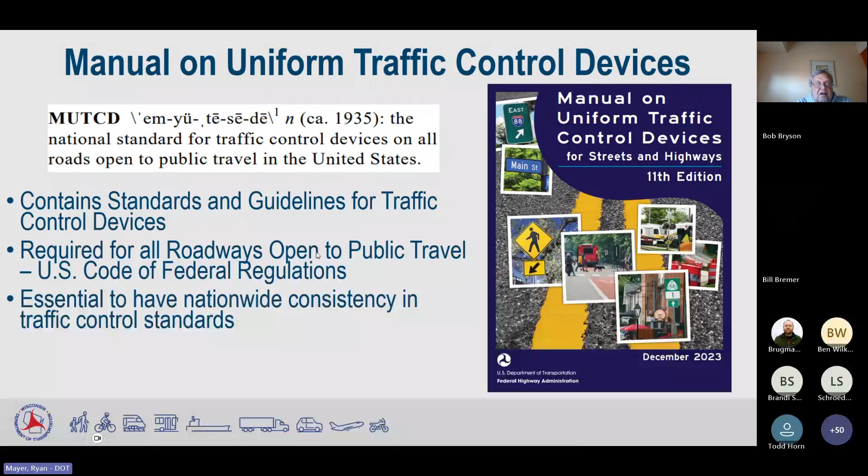The 11th edition of the MUTCD, we just adopted it. There's a bunch of statutes that say we need to adopt a manual, and Wisconsin has decided that we develop a state version of the MUTCD, the WMUTCD. That WMUTCD must be in substantial conformance with the national version of the manual.

This go round, we worked a lot closer with FHWA than I believe has been the case in the past. There's a significant effort on FHWA's part to make sure our manual conforms with the national manual, whereas in versions past, maybe a little less emphasis was put on that.

If you look at the previous Wisconsin MUTCD, you'll see a significant amount of state-specific text, as compared to this new manual, where once again we're trying to be consistent nationwide. So ideally you would have no state-specific text in the manual on uniform traffic control devices. But obviously there are cases where state statute requires you to include something specific to Wisconsin.

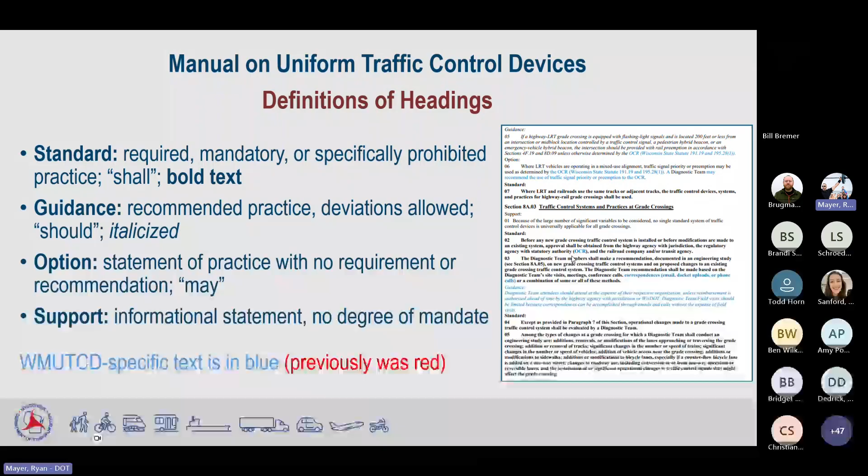Location of the Wisconsin MUTCD - if you just Google WIS.MUTCD or WMUTCD, Wisconsin MUTCD, it'll take you to this page. Parts are kind of split out into different pieces here. And then at the bottom of this website, you can find the 2009 version, which is sometimes nice to look at if you want to see what we had in place previously, and why a decision was made years ago. You can find that previous 2009 version at the bottom of this web page. It's a link, and it just takes you to the whole thing. It takes a while to load up, but at least you can compare to what was previously used in Wisconsin.

The TEOpS ties into all this, obviously, because everybody in Wisconsin has to follow the Wisconsin MUTCD. The state DOT decides, if we have additional guidance that we want to follow, we put it in the TEOpS, so that it's something that WISDOT does, but it doesn't necessarily have to be done by local municipalities. They can certainly follow our guidance in the TEOpS, and we'd encourage that, but there's no obligation to do so. So if the MUTCD says you may use a sign, for example,

in the TEOpS, there's a possibility we would have guidance on when we want to use it, right? So the MUTCD says you may use it, and we say, well, let's use it in these cases.

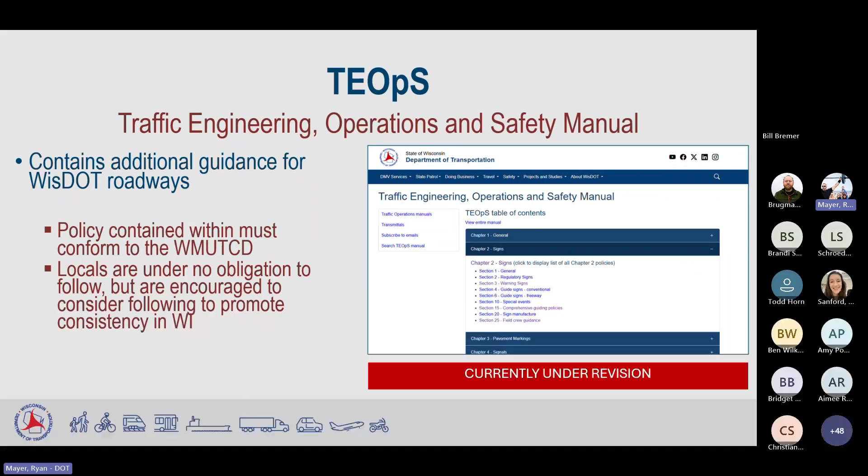I guess I should mention too that with this change to the new manual, the new version of the manual, there were a lot of changes necessary in the TEOpS. A lot of it is just different sections were moved in the MUTCD, so I essentially had to change the section numbering on some of that stuff. But there's some other changes that needed to be made, and it's currently under - well, I'm putting the finishing touches on the revision, and then FHWA will have to review that for compliance with the manual. So that should be updated in the near future, the TEOpS.

Along with all these other changes, we cleaned up our sign plates as well. There were new signs added, signs taken away. WISDOT had historically used different sign codes than the MUTCD had in some cases, and so, like I said before, a lot of effort was put in this time to ensure that WISDOT is in compliance with the manual, and that includes having sign codes match the manual. So there are a fair amount of changes to sign codes as WISDOT knows them.

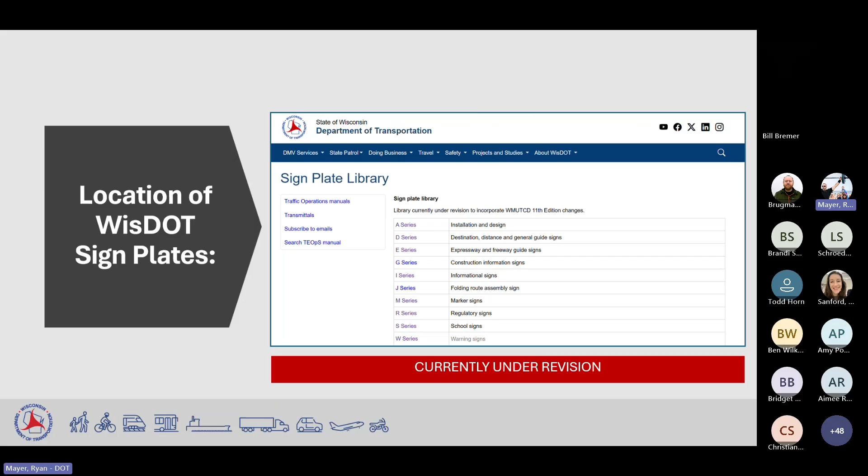So that'll be a bit of a learning process there, although in the end it's going to be very nice because our sign codes will match national sign codes, and then it should be nice and easy - you could look in the WMUTCD or TEOpS and everything is called the same thing. But that's under revision as well.

Jumping into it here, I didn't have anything on chapter 1. That's kind of the rules, or the reasons why the WMUTCD exists. One thing to note in chapter 1 is that there's a spot where they talk about compliance dates with this new version of the manual. A few things had - if you change a sign, sometimes FHWA would say you need to have these signs changed within 5 years of adopting the manual. And there are a couple of those, although they're fairly insignificant, in that WISDOT had already kind of done the things that they're requiring a state do by that compliance date. So we just skipped that slide, even though I spent some time talking about it, but I thought it was worth mentioning.

2A04, design of signs: if a standard sign exists, we must use that sign. That's part of why we've got sign plate changes, since we had used a Wisconsin sign when a standard highway sign essentially the same thing exists. We must use that standard highway sign instead of the one we've historically used in Wisconsin. Symbols must be identical to those in the standard highway sign manual, and word legend signs can't substitute for standard symbol signs unless allowed in the WMUTCD.

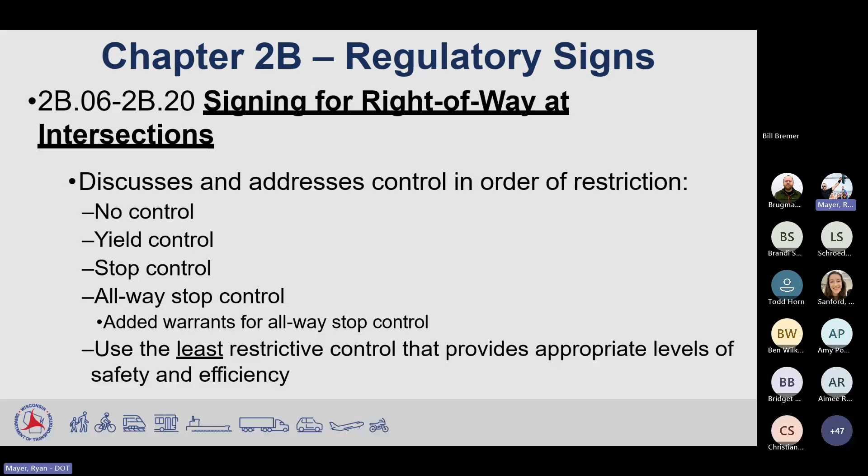The gist is to use the least restrictive control that provides appropriate levels of safety and efficiency.

Getting into speed limit signs. There's reduced emphasis on the 85th percentile, but it's still used for technical guidance. Other factors should be considered, like the setting of the roadway, but in a rural situation we still say the posted speed should be within 5 miles per hour of the 85th percentile.

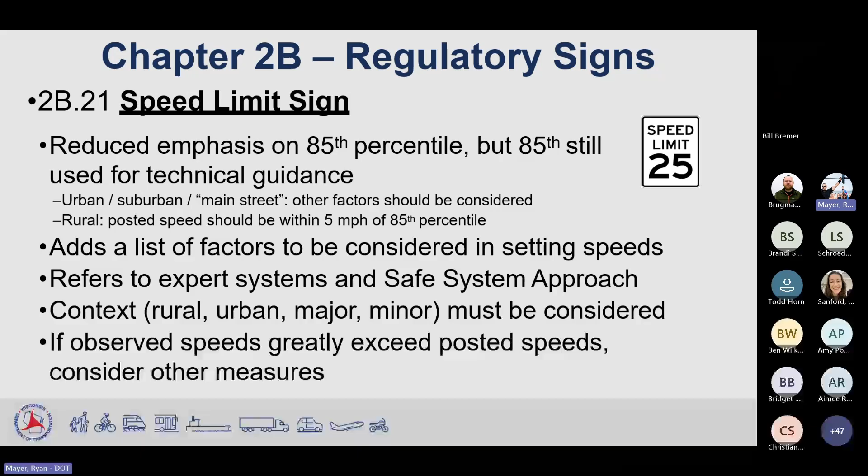It adds a list of factors to be considered, as I just mentioned, and refers to expert systems and the safe system approach, which must be considered in that context. If observed speeds greatly exceed posted speeds, other measures should be considered to reduce the speed of traffic.

Speed limit signs again: they're obviously traffic control devices, but setting speed zones is an engineering practice, so one could argue it's not particularly appropriate to talk about how to set speed limits in the MUTCD. In the final ruling, FHWA stated they may evaluate removing speed zone setting content from the MUTCD in the future, but you would still be able to define the design and placement of speed limit signs in the MUTCD—it would just become a separate document for setting speed limits.

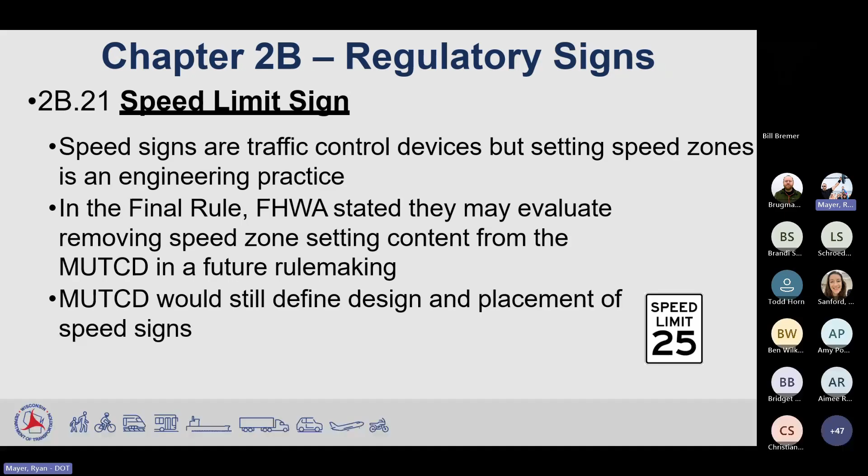Another regulatory sign worth mentioning: at roundabouts, we're replacing the black and white chevrons in the central island with one-way signs. The reasoning is that FHWA determined that black and white chevron bank essentially mixes a regulatory and a warning sign together—the chevrons generally being a warning sign, but the black and white being regulatory, trying to give drivers direction on which way to drive.

They didn't like mixing warning and regulatory signs together into one sign, so the alternative is a one-way sign, and the object marker shown on the right is optional. WisDOT has decided that if any approaching leg of a roundabout is 45 mph or greater, all those one-ways will have an object marker underneath them. You could also use them if you had concerns and the speed limit was less than 45, but that's going to be our standard practice.

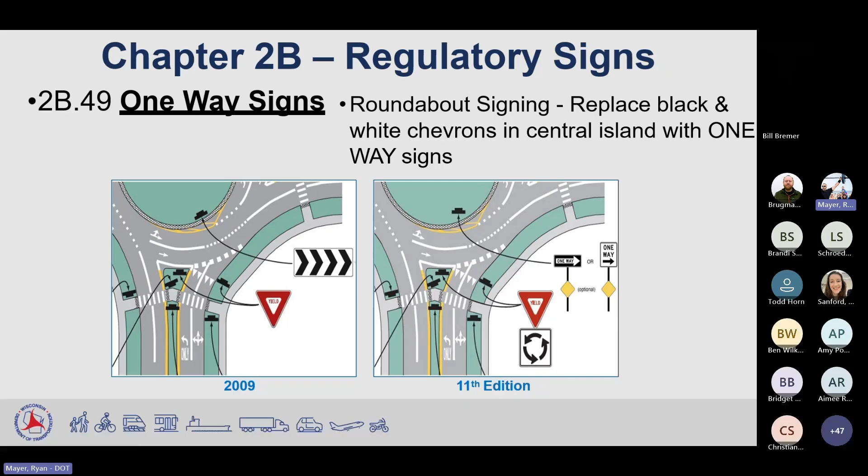One thing worth noting too is the placement of warning signs. If you've looked that up in the past, you'll remember that in the MUTCD almost all these values were struck through with a WisDOT-specific red value next to them. We can't do that anymore—we've got to comply with the manual in this case.

Generally, the reasoning is that WisDOT has been using those values for years and years, to the point where we no longer know exactly how we came up with them to begin with. We do know they seem to be working well for us, so WisDOT is choosing to continue using our specific values, which provide a little extra distance to decelerate to the condition.

Those values will be found in TEOpS 2-3-5, a new policy we've created—it's essentially this chart, except with WisDOT's own values. One thing I'd add is that the greater distance is especially useful as you're approaching an intersection, going from 55 to 0 at a stop.

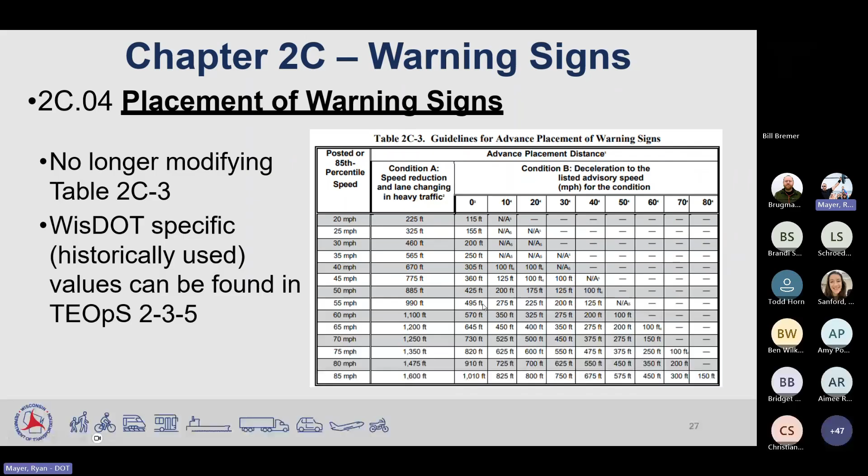No longer would a local look in the MUTCD and see the same numbers that we have. And they can certainly look in the TEOpS to find those.

Horizontal alignment warning signs and plaques. There's a bit of change there. Table 2C4 provides new direction on the use of them, taking into account the amount of traffic on the roadway. So it's a little bit different. Nothing too crazy that would make a person think they've got to go out and change all their horizontal alignment warning signs, but it's different, and it's a wider range of devices that can be used—wider edge lines, rumble strips, that kind of thing.

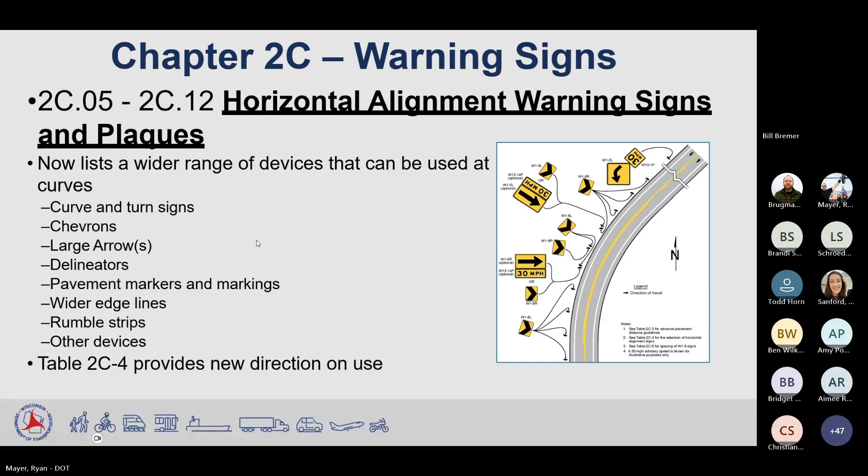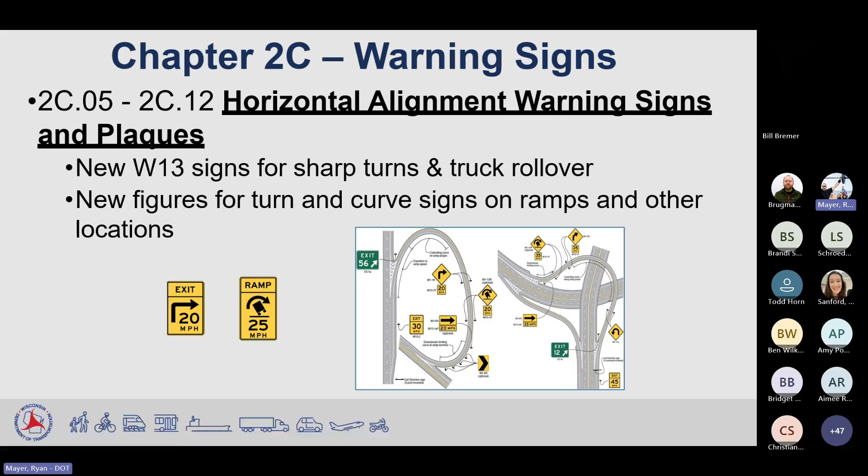Horizontal alignment warning signs, again, the new W13 signs for sharp turns and truck rollover. There's a couple new figures, once again, for specific kinds of cases where they're giving you examples of what you might do, which is nice.

This is a big one that a lot of people have been interested in: vehicle speed feedback signs. There are two versions of this sign—a vehicle speed feedback sign and a vehicle speed feedback plaque. The plaque is meant to be placed underneath a regulatory speed limit sign, and it's essentially the classic case of what you see in Wisconsin, warning drivers how fast they're going compared to the regulatory speed limit. The vehicle speed feedback sign is larger and taller, with dimensions essentially the same as a speed limit sign.

Those are to be used in advance of a horizontal curve, so you'd put those in advance of the curve along with your advisory speed posted with a curve warning sign, that kind of thing. So when used in Wisconsin, the vehicle speed feedback plaque is going to be the thing to use. Has to be black and yellow, or—poor job on my part here—could be black and orange in a work zone.

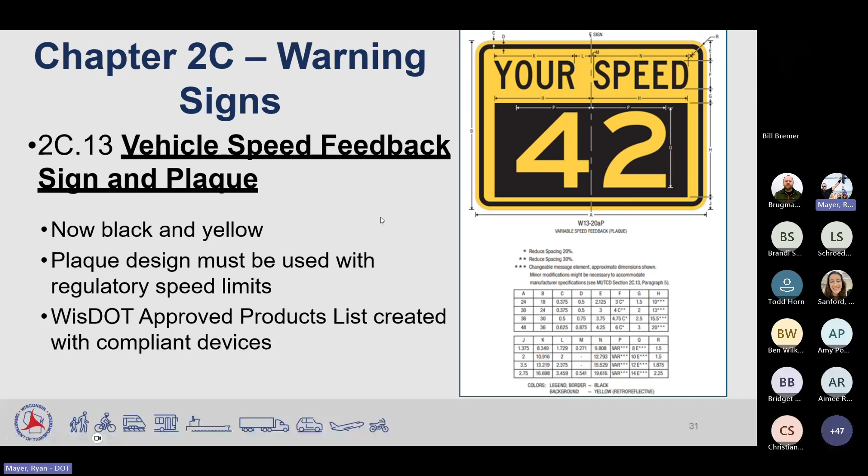So we're going to take the stance at WisDOT that we'd like locals to try and do what they can to make their feedback sign comply with the new version as best as possible. Obviously you're not going to change the color of it, but sometimes they say 'too fast' or 'slow down,' that kind of stuff, which is specifically called out in this version of the manual as not being acceptable. So you can turn that stuff off on these generally—that'd be one way to move towards compliance until it wears out and you buy a new one.

Chapter 2D, conventional roadways. Not super exciting here, but overhead street name signs will now have a white border on them. It previously didn't have to. If you picture monotubes, generally those are all green signs that do not have a white border, but they will now.

Conventional roads, Chapter 2D again, I thought this was worth mentioning. This is going to be a change where we no longer use the alternate plaque for emergency routes. Say the interstate, it's now going to be an emergency route to Interstate 39, and it'll be green and white.

With states, we don't have a bunch of money sitting around to just go out and change all these at once. We're going to change them out on the corridor process, which means you will see a variety of emergency route and alternate signs over the next 15 years or so, unless somebody comes up with money to do them all at once, or at least in corridors. We're going to take them as they come, with the message to the public and law enforcement being that it's the same thing. This emergency route is the same as alternate.

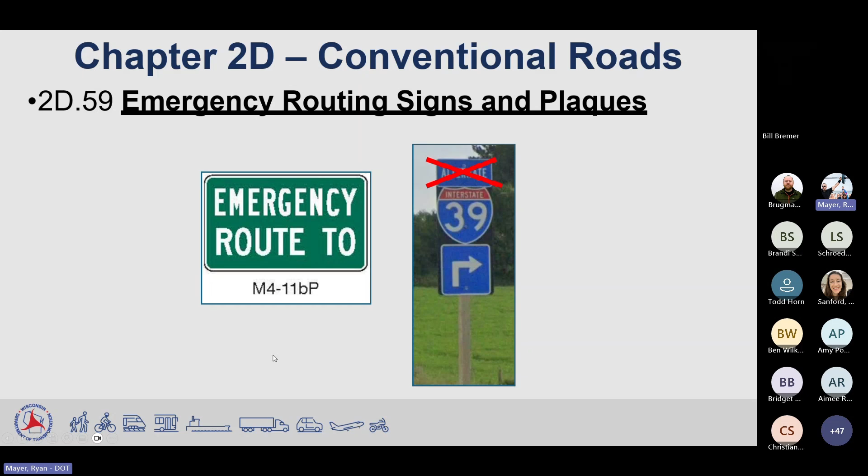All right, that was it for signing. Chapter 3A04, line widths. It says the normal line should be 4 to 6 inches wide pavement marking, and a double line should be at least twice the width of a normal line. WisDOT is choosing 6-inch markings on our state highways.

It is not a shall condition to use 6 inches. I think initially in the proposed version of the manual, they had language saying 6 inches was going to be the normal line width, and so we kind of started doing that. Obviously there are benefits to having 6-inch lines as opposed to 4-inch — there are crash modification factors for it. Plus autonomous vehicles like wider pavement marking lines, I think. So we decided, even though it's not required per the WMUTCD, we're still going to stick with 6-inch lines, but the locals can continue to use 4 inches if they'd like.

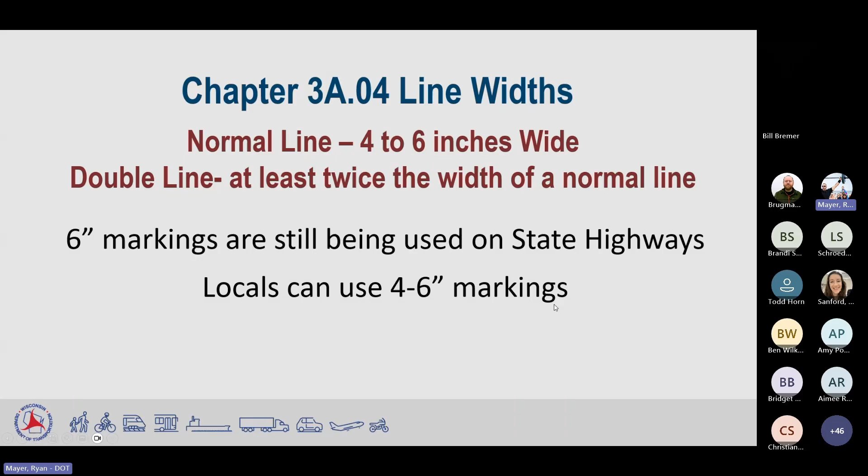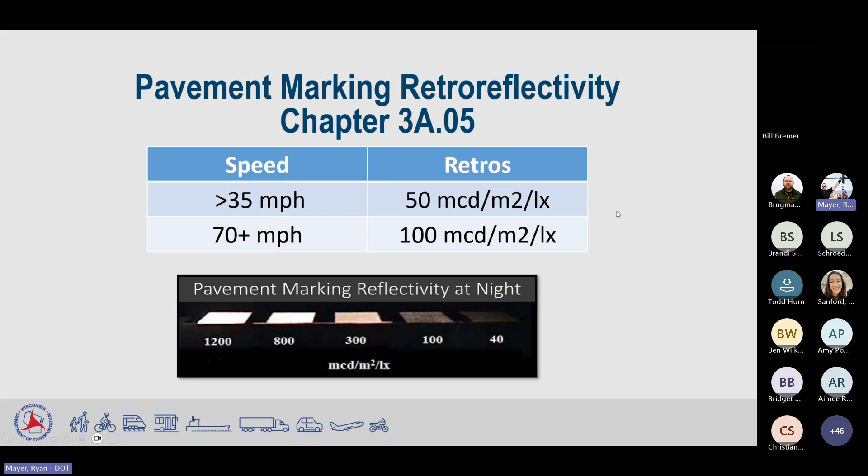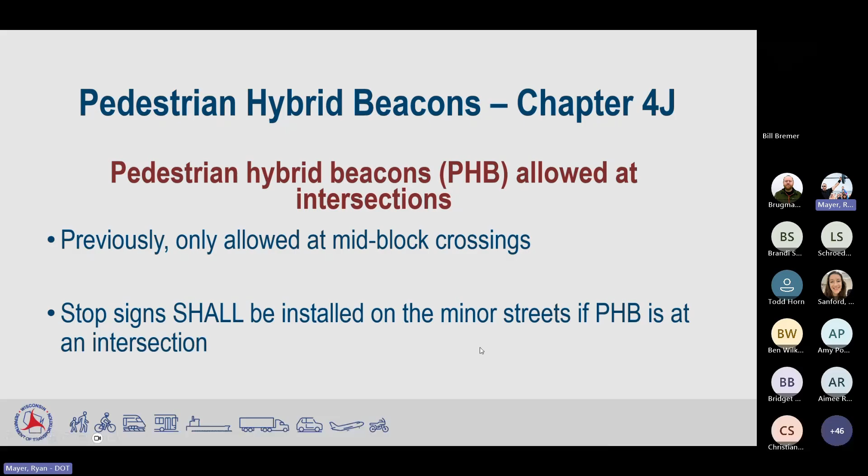Pedestrian hybrid beacons are allowed at intersections now, previously only allowed at mid-block crossings. And stop signs shall be installed on the minor streets if the pedestrian hybrid beacon is at an intersection.

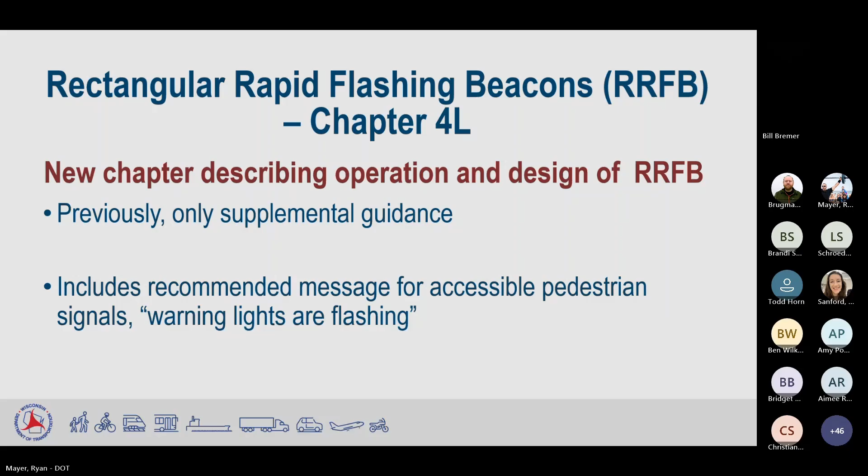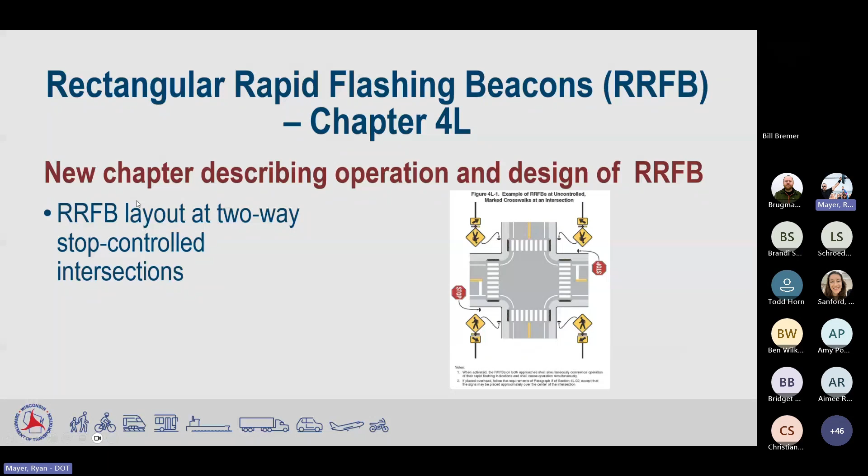RRFBs were previously a kind of interim approval. Now there's a chapter describing operation and design. It includes recommended messages for accessible pedestrian signals, and the warning lights are flashing. So those are some changes there. That new chapter describes design and operations and provides a layout of the signs.

Wow, speaking of audible, I don't know if you guys can hear that, but there's an alarm going off here at the sign shop. Now it's done, that's good. Sorry about that.

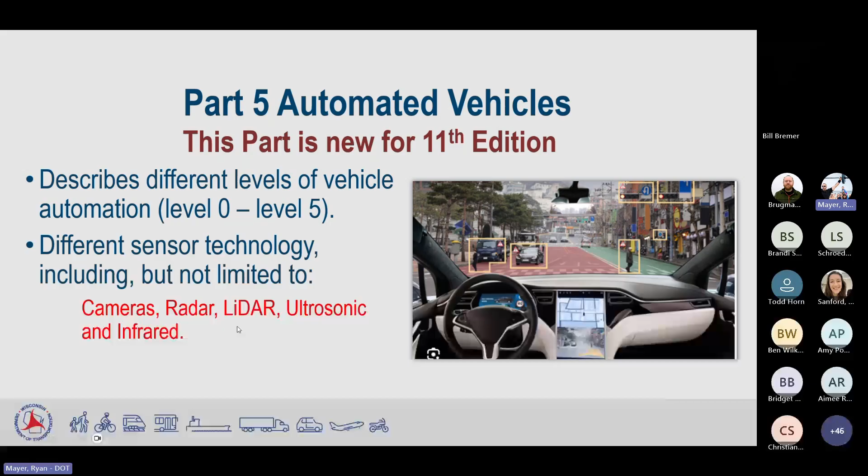Different sensor technology is covered, including but not limited to cameras, radar, LiDAR, ultrasonic, and infrared. Just figured it was worth mentioning that this is now in the manual. It's a very short section though, not a ton of pages on guidance, but that'll probably get bigger as the years go on. It provides guidance on how to design signs, pavement markings, and traffic control devices in a consistent and easy to read manner for various automated sensors. Agencies should adopt policies and practices to incorporate machine vision into their traffic control devices.

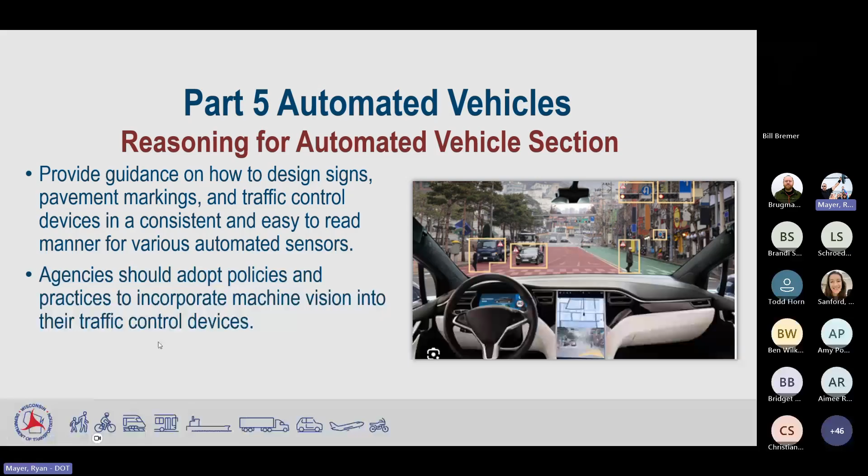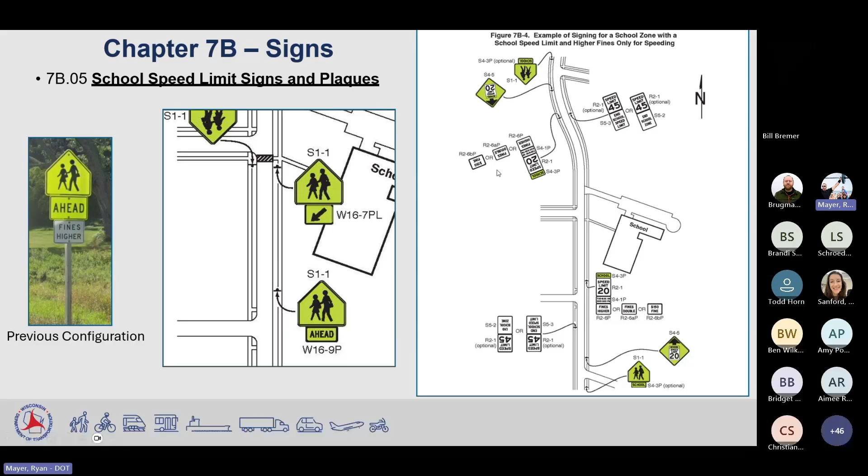We took a look as we were reviewing this whole new manual and our state statutes in association with the new manual. In 7B.05, school speed limit assembly, it says a school speed limit assembly shall be used to indicate the speed limit where a reduced school speed limit is specified for such areas by state statute. So of course in Wisconsin state statute we have the fixed limits, and one of those is a school zone. So we read this as we have to install, shall be used, we have to install a school speed limit in our school zones.

All of them. Currently we don't have school speed limits in all of our school zones. A good example of that occurring would be in a rural area where you've got, say, a high school and it's 55 miles an hour. There's no sidewalk. The chances of a child being at or about the roadway is slim to none. Kids are driving to school or being bused to school. So we'd historically not put a school speed limit out there.

We will be doing so now, and our default will be essentially 10 miles an hour less than the posted regulatory speed limit. So in the past we might have put some school zone signs out, not necessarily the school speed limit, but now we will be placing that school speed limit in all school zones. The plan there is to take that as they come with the corridor signing process. So that'll be another one where for 15 years we'll be kind of working on updating our signing there.